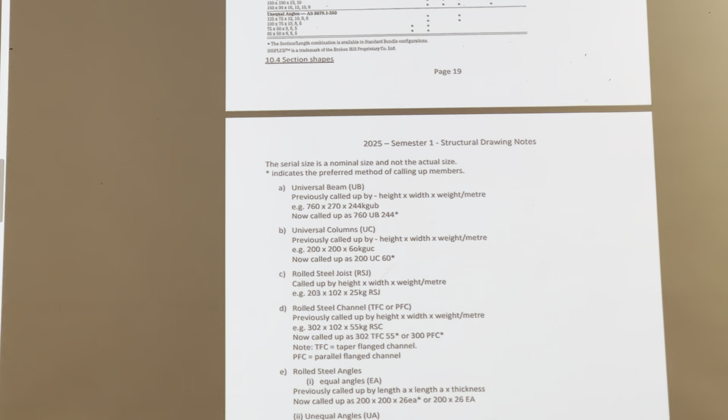A bit of revision. I shouldn't really have to do this, but there were people who weren't in class this morning, so I'm not going to go over everything. In fact, you're going to have to find out from your colleagues some of the things I said in today's lecture.

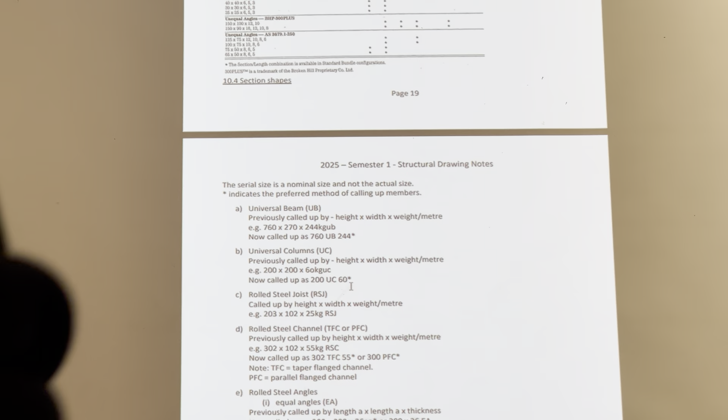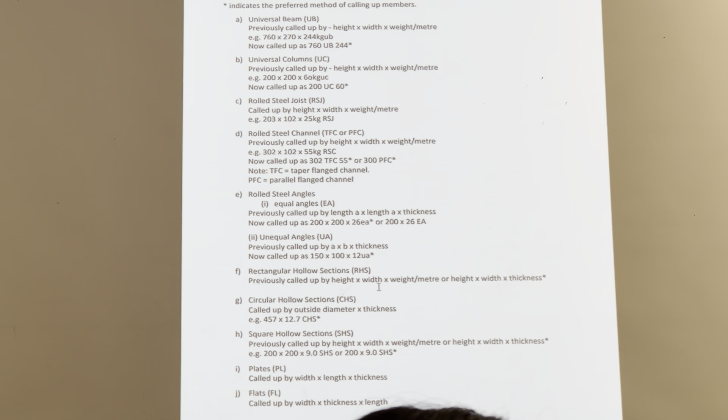We talked about universal beams and universal columns and steel channels and angles, and we talked about them in relation to the assignment. We also said how I want them called up in the assignment, and if they aren't called up that way, you will obviously be losing marks.

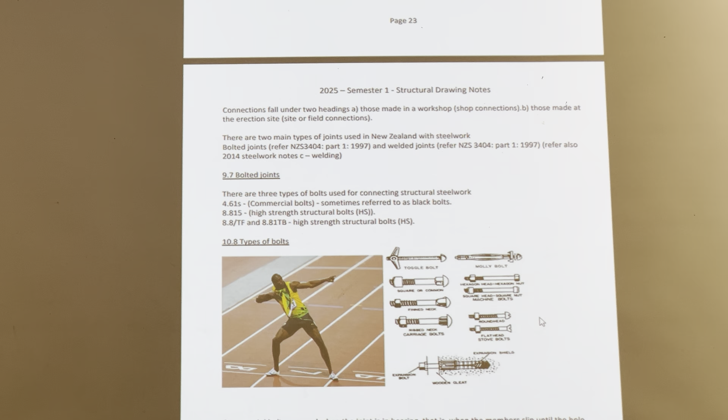I then went on to talk about the different ways we connect steel members, and indicated that bolting was the biggest one. I went over the different types of bolts and how we position them when we dimension them.

Now, all these things are very critical when it comes to assignment 3. I don't know how many of you noticed, but assignment 3 is worth 40 marks. So if you've been doing fairly badly in the old civil department, that 40 marks could mean the difference between passing or failing. For example, we've done 50% of the course.

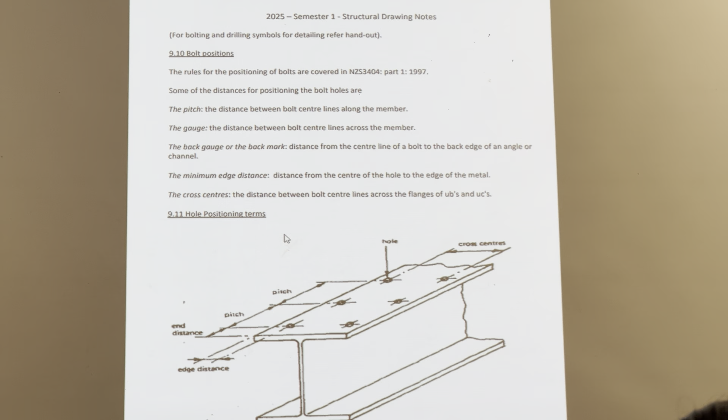If you're sitting on, say, around about 20, 18, 17, you're going to need at least 30 in this last assignment to make sure you pass.

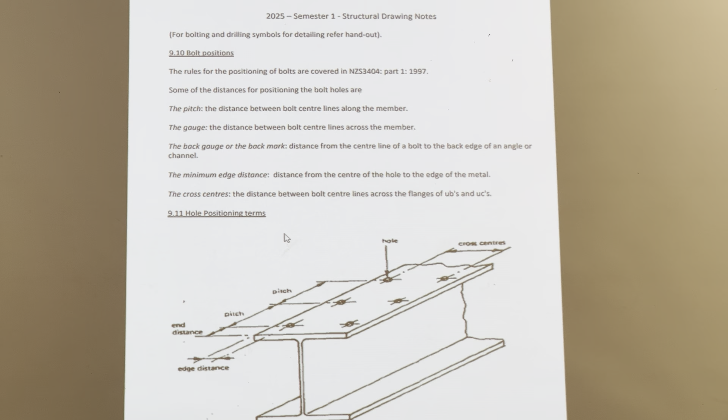So not attending the lecture is not a good start. That means this round face here becomes part of your life next year as well, or next semester, okay? The ones that don't like that face, if you can put in a bigger effort, you won't have to see me next semester. But you might still end up seeing me in the project class.

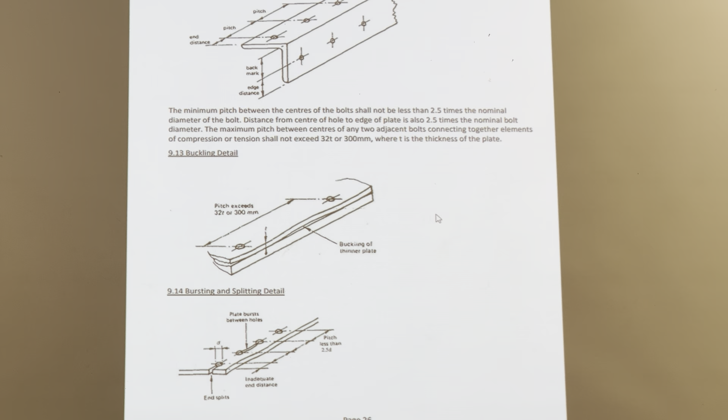So, rolling on from that, we talked about the minimums and maximums for bolting, and I told you that's going to be in the test, and I'll talk about that in the revision class as well.

And I went on to tell you the type of weld that is going to be needed in the assignment. So for those who weren't in this morning's lecture, you will need to correspond with other people in the class to figure out how to do the symbol for that on your drawings.

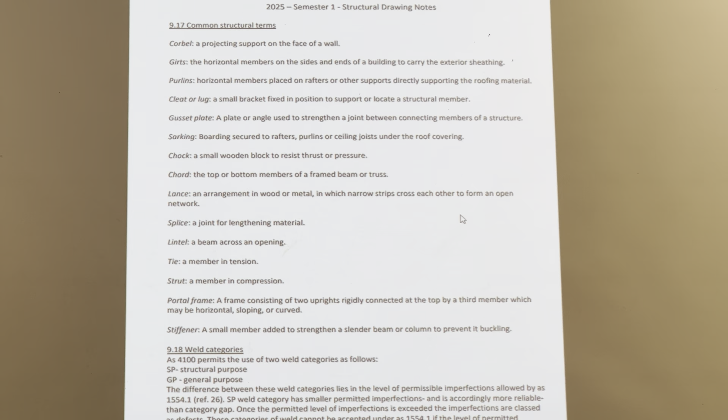So the other thing that I covered in the lecture was how to get started on your assignment.

So there are two types of students with the structural assignment. There are the ones that go, oh yeah, I don't really understand that and I don't know how to start. And they're still doing that in about week 10, 11, or 12.

And then there are the students that make an early start and suddenly find they have a few problems, and they ask me or the past student, and it gets them over that hurdle, and suddenly they've just about finished their assignment. I'd like you all to be that type of student if I can.

So this year, I've given you a couple of examples from past year students. So in terms of the scheduling...

Today we're going to talk about scheduling steel, and your assignment won't have a beam or a column, but you will have what we call a rectangular member, a hollow rectangular steel member, which will make up our portal frame, and you will have an angle and you will have a plate.

So special care in watching what I do now in my demo will mean you can get yourself some marks in your assignment, and the demonstration I'm going to do for the class exercise is also in the test, worth 3 or 4 marks.

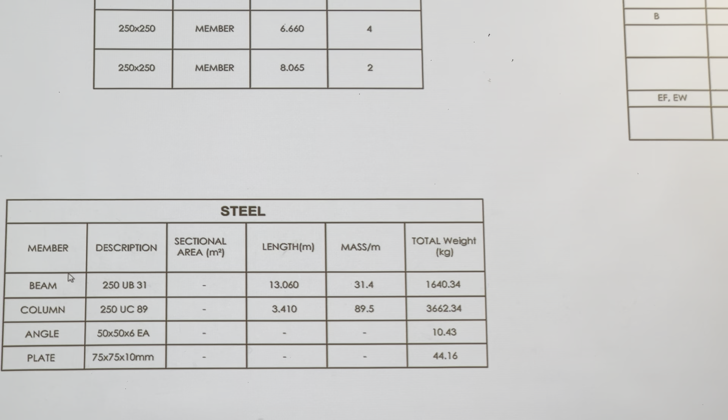So for those hunting down some marks, there might even be the odd half-mark question coming up. Now, if you've already got a half a mark, tough, you won't get any more.

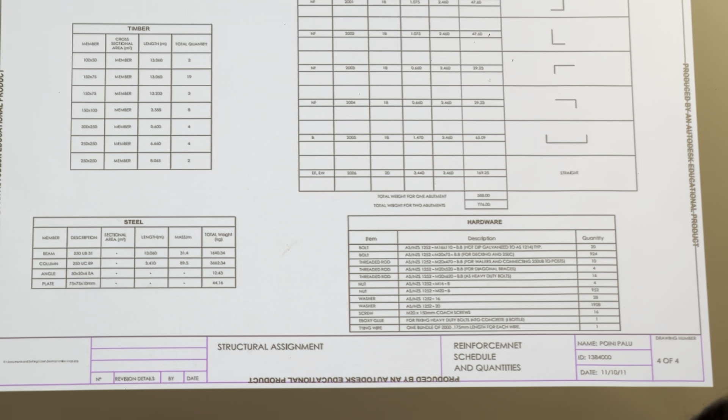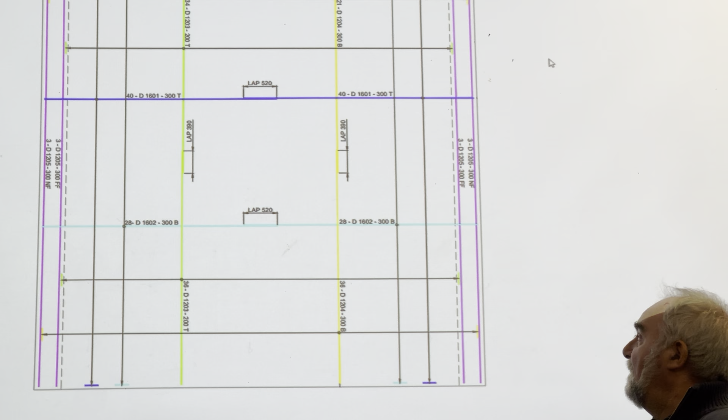The other thing I showed you in the lecture this morning - now I'll explain how I would start my project. The first thing I've noticed is there's no dimensions on that, which is great. Don't put dimensions on here, this is not a dimensioned drawing, this is a reinforced concrete steel drawing. The second thing I noticed is that the student has left a gap around here, which is the cover, so they obviously did an offset for all these lines so that nothing went into the cover.

So tip 1, draw a rectangle. I'm sure most of you can do that on CAD. Tip 2, offset for the footing and give it a line type that looks similar to that. Step 3, offset the cover all the way around. Step 4, have a think about it. This is not your assignment, this is a different one.

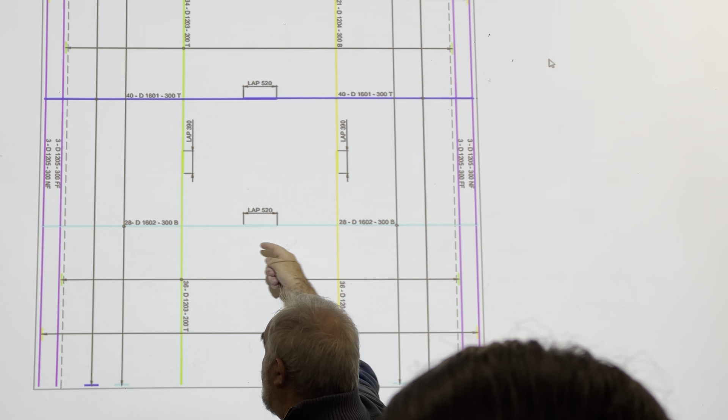These bars went along and down, and the blue ones went along and down, and this one here went along the bottom and came up. So at the end here we have to do a donut, shaped where it goes along, curve, like that - it's got a curve at the end. So you've got donuts at the end of the light blue and the dark blue.

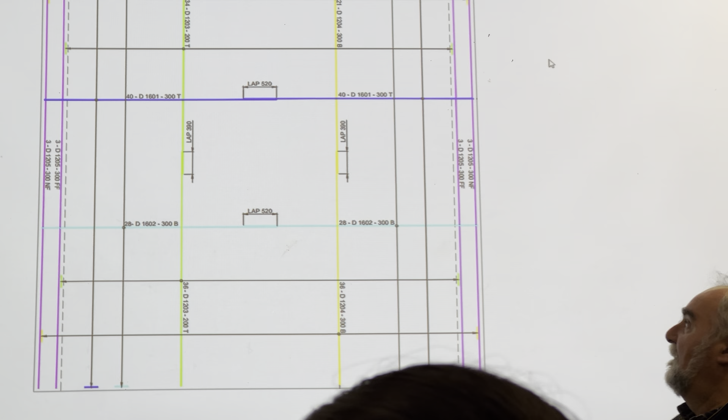You've got a lap, and I've shown you how to draw a lap, in that direction. Notice the smaller lap - there is a mistake here because it says 36 and it's lapping with 21 bars, and 36 and 34. But it doesn't matter when it comes to the overall reinforcing schedule - for example if that was 36 and 34, that makes 70, so the number of bars would be 70 on your schedule, but you'd break them down for where they overlap, 36 and 34. In your case they'll be the same number because they're exactly the same bar.

Remember how to do that? You divide the distance from where the bars start and end, etc. This circle is 2 times the diameter of the bar that you've got the circle on. You'll notice all of these fit very nicely in between the lines, and that's not easy to do - you may have to muck around with it a bit to get it to work. I don't want any of those lines overlapping anything. They can come down between here on these dashes, but not on any of the text. Alright?

Very good example, that. That's going to be worth about 7 marks, and the reinforcing schedule is worth a very similar amount. So if you can get a handle on that, you're well and truly on the way - 14 marks towards 40 is quite a lot. And of course you should be able to do most of your quantities as well after today, except for the timber one.

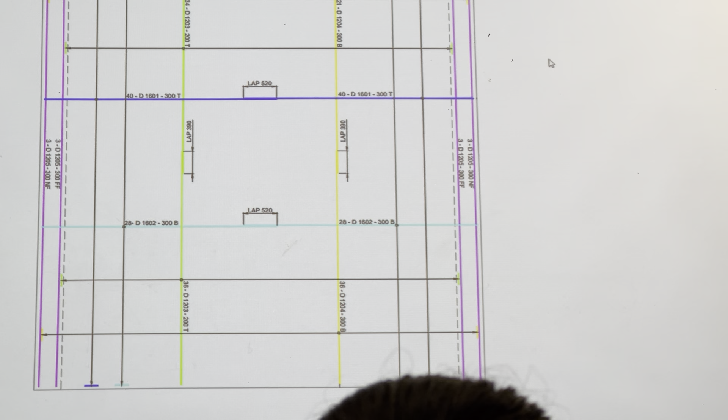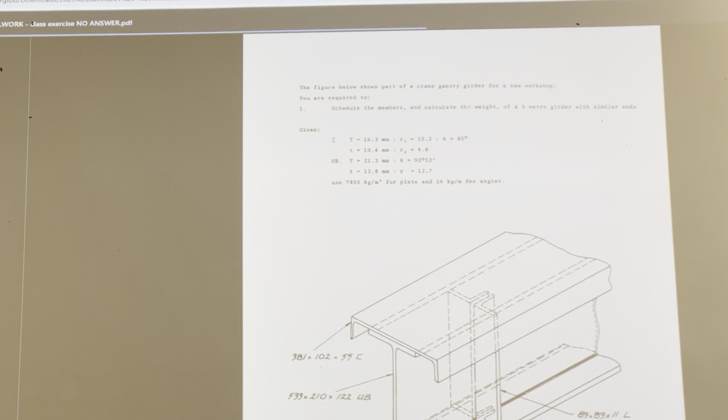Right, so without further ado, we'll have a look at the class example. Can you all open this up on your computer screens? It's only showing one end of what we call a girder. A girder is a beam that's made up of multiple members.

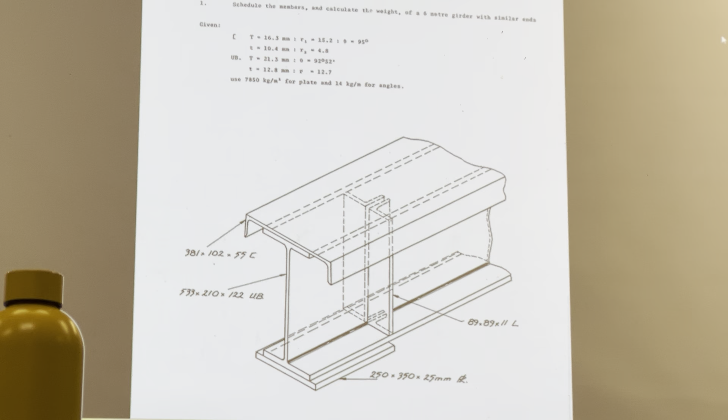And where you might likely find this - like I said to my class this morning, I think I did - if you've seen any of the Fast and Furious movies, about 8 of them, and you're into motor cars, then you would have seen the beams in the garages where they're fixing those pretty cool cars, with those things on chains that lifted the engine up so that they could fix it or swap it for a faster engine. It's quite common to see a girder type set up in a common garage, like the local garage here in Auckland, where you get your car repaired.

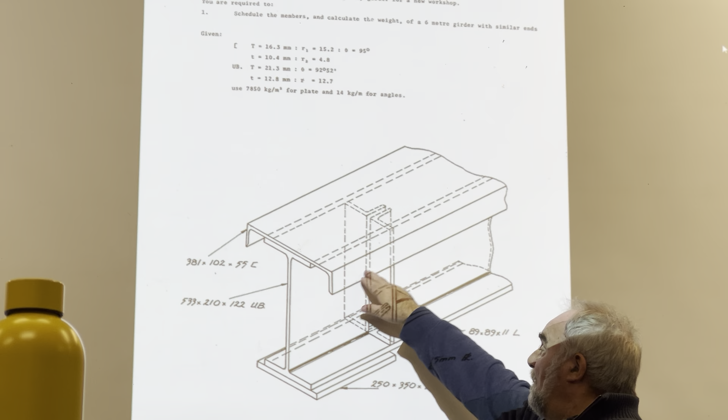And to strengthen the girder, often they have a second channel on top of the main beam going all the way, and at each end where you want to get some strength, they'll put something like a plate and a couple of angles, which will make a very solid girder.

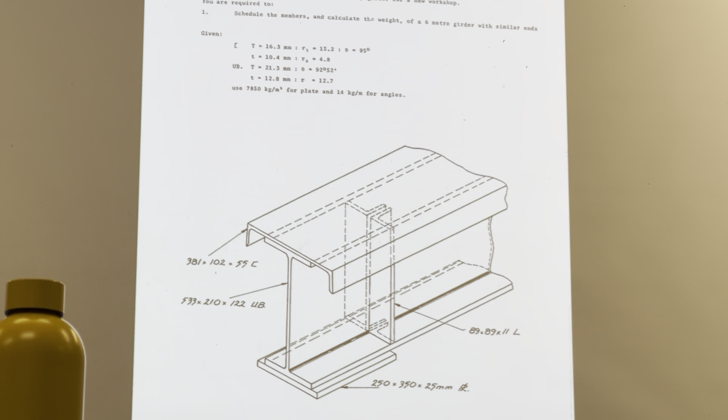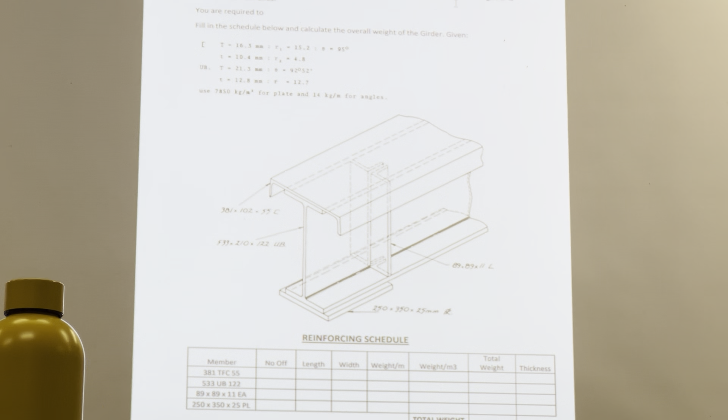Now what I'm teaching you by all this is basically what's written up the top there, and how to schedule it, schedule that steel so that a steel supplier can see it and order off it, and so that you can price it to work out how much money that's going to cost the client. So in order to do this, and I'm not going to give you the answer, but I am going to open it up. We have to draw up a table. So let's do that, eh?

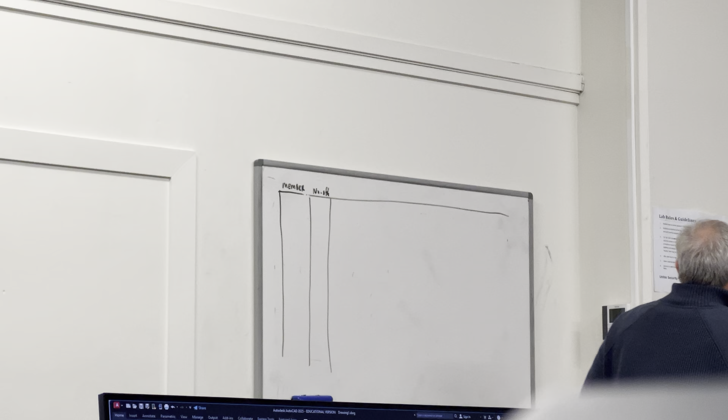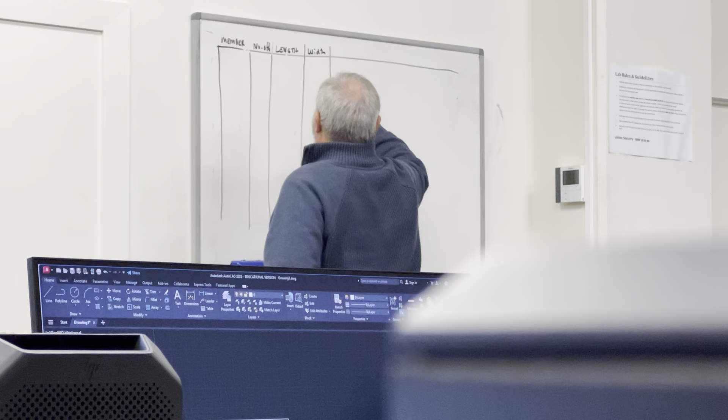So we have the steel member called up here, the number off, so member, number off means how many there are, followed by the length, then the width, then the weight per metre, and finally the total weight of each member. And as a side thing over here, the thickness.

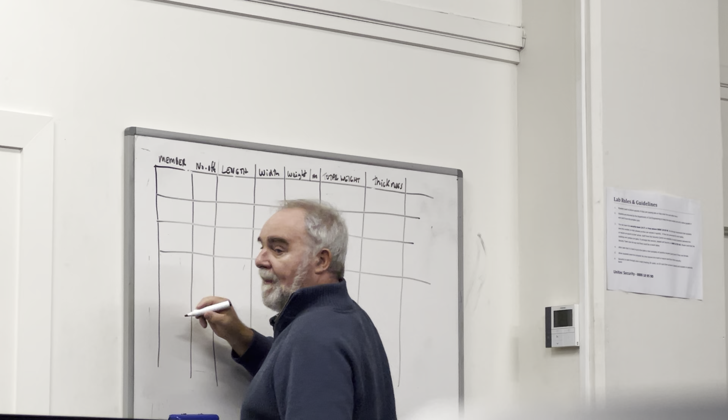Okay, so we're going to start with the member on the top, this one here, which is called a 381 by 102 by 55C, which is the old call-up, which you may well get in a test, and that translates to the new call-up, which is just a 381 TFC, a tapered flange channel. You can see that that's tapered a little bit. And it's a 55. So the number of them, there's just one on top.

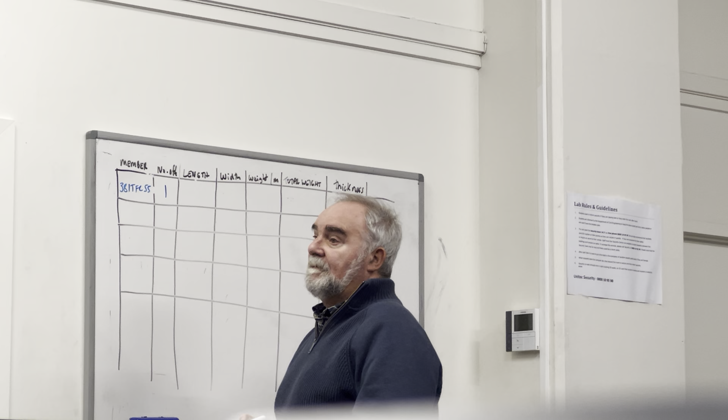Easy, the length. Anybody tell me the length? Is it 55? No. 6 metres up the top. Well done, you've just got yourself half a mark, but you got a half a mark last week, right? Damn.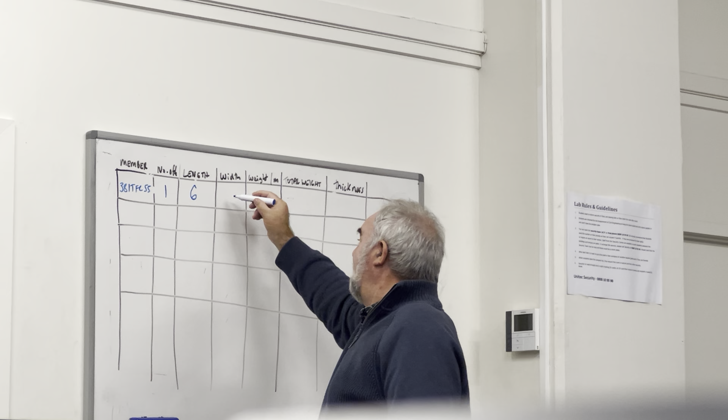Can you keep answering the answers? The width is not taken into account. The weight per metre. What's the weight per metre? The problem is all the good students have to shut up. 40? See, he did almost work. How much? 40? No. 1-4? No. 785? Count down, you missed it. 7850? No. Okay, so those that were in class this morning will know that the weight is the last number, which is 55, okay? So the weight is 55.

So when we multiply that by that by that, we get, for those that aren't holding up their cell phones, come on, you must be up to double task, no? I know 1 times 6, I can do that. 330? Thank you, no, that's not half a mark.

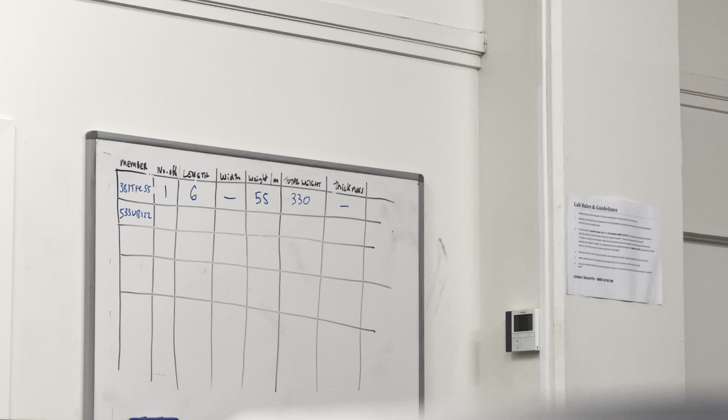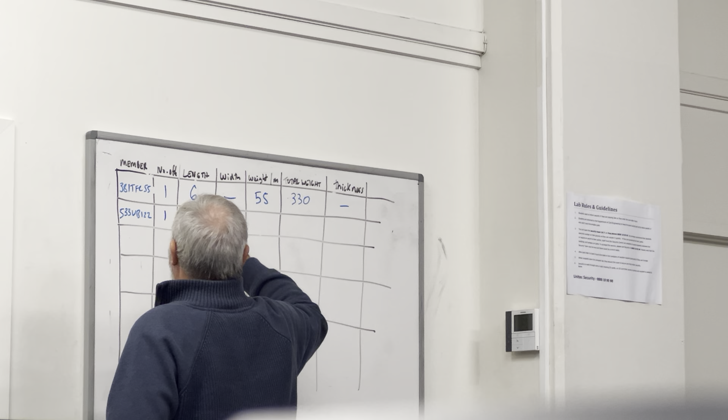Making you work. The next one, 533 UB122. That is the universal beam. Number of, that goes all the way through, that's 1. Just 1, right? And the length is 6 metres. Don't worry about the width. The weight per metre? 122? 122, correct. Equals 720? 720, right.

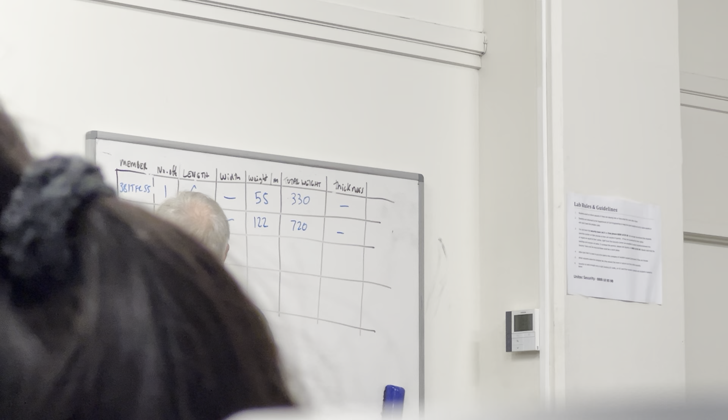Now it gets harder. The angle. The angle is 89 by 89 by 11 EA. But this morning I mentioned that you don't have to do the two 89s because it's an equal angle. It'll be 89 by 89, won't it? So it'll be 89 by 11 EA. So 89 times 11 EA. There is 2 of them there, and 2 at the other end makes 4.

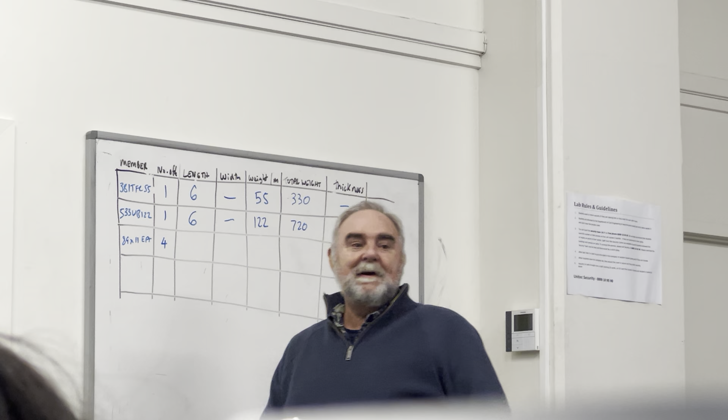How long are they? For half a mark, anyone? Where do they go from? They go from the inside of here to the upper side of there, right? So if I draw the beam, the angle fits between here and here.

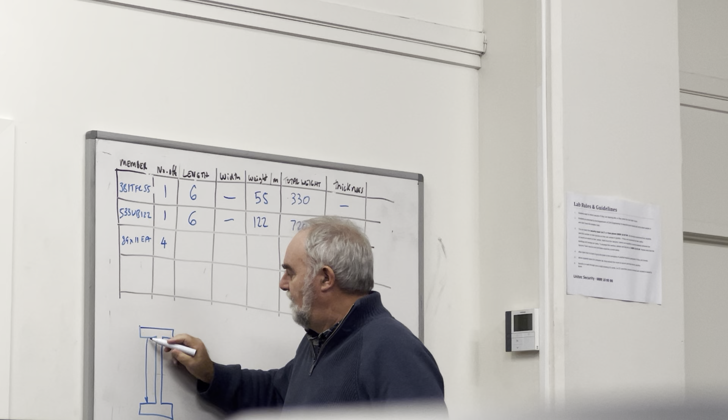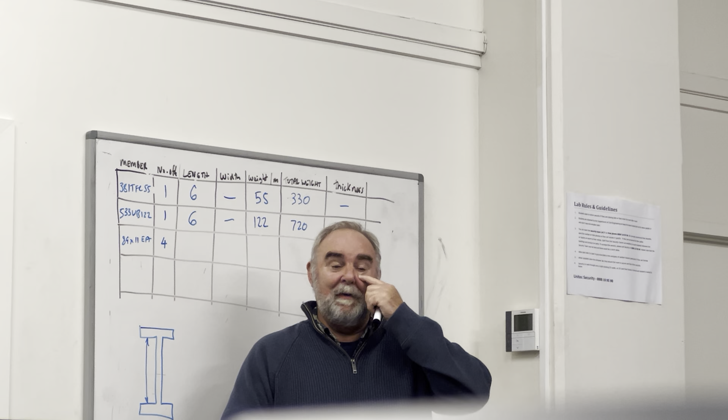Anyone tell me that height? 210? It's 2 what? 210? Wrong. Anyone else? 533? 533? Yeah, closer. Like I used to say to my kids when they were looking for the hidden Easter egg, you're getting warmer. Not that there was any Easter egg there, but you're getting warmer.

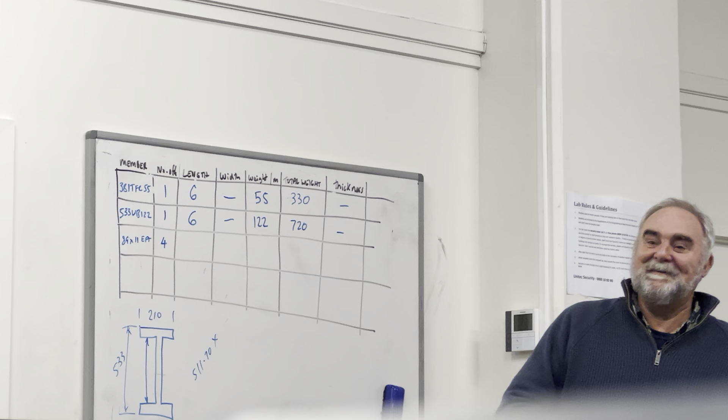483... 329, 483, that's getting closer. Don't say 484. 411. Okay, and the answer's at the top.

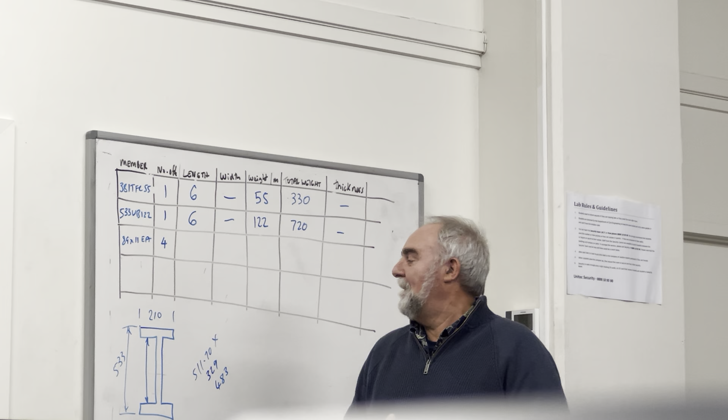For those that were in the lecture this morning, I talked about big T and little t. The big T is the flange, and the little t is the width of the web.

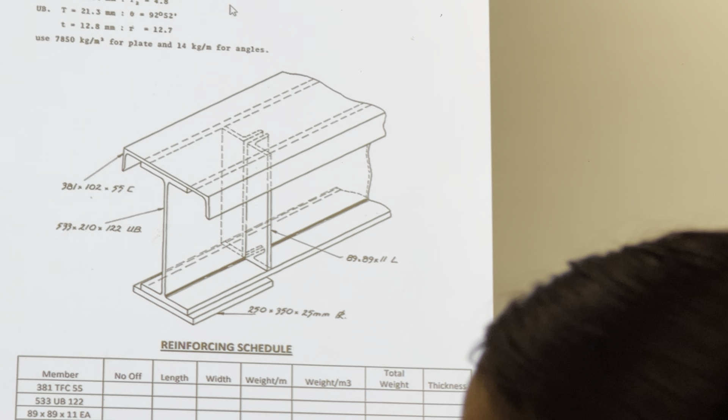So it's big T. So the answer is 533 minus 20 something. 20, 1.3. We're talking about the beam. So it's 21.3. 2 times 21.3. So 533 minus 21.3 minus 21.3 equals 490.4. That's close enough for half a mark.

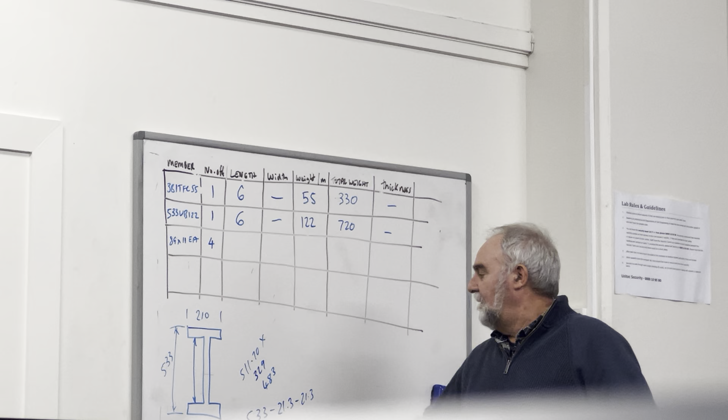20 or minus, that — which one's close enough? 483, close enough. 483 is close enough.

No, it's within 5%, and if you told Donald Trump he was within 5% with his tariffs, you'd be lined up and shot.

Yeah, so that's how you work that out. So hold on, I'll stop working now. I've got to keep working.

The length is now 0.4904. The reason for the 0 is in the end, our total weight is going to be in kilograms, and you have to convert it to meters. Okay, just like the steel. The width here is not relevant. The weight per metre, last half mark chance.

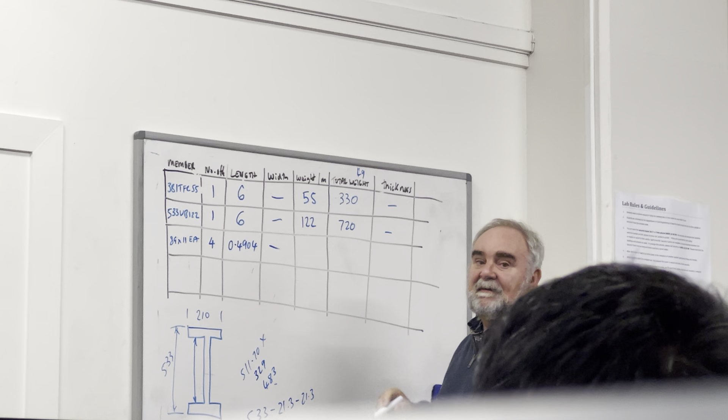Count you down, 10, 9, 8, 7, 6, 5, 4.

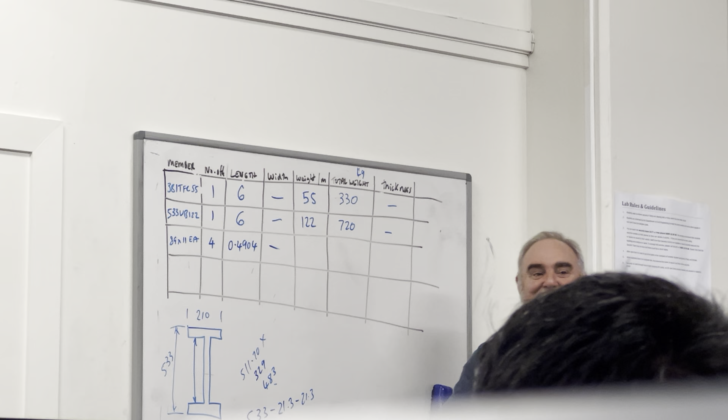Do I get marks if I'm not from this class? What class are you in? Yes, sir. You are too? No, you're sneaking into my class. Yeah, that's why you'll get marks off, because you're talking in the wrong class. He knows it — it's like you know the answer to the lottery, but yeah.

Okay, it's up there written, somebody yelled it out before for another thing. It's 14 kilograms per metre. Alright, so the answer's 14.

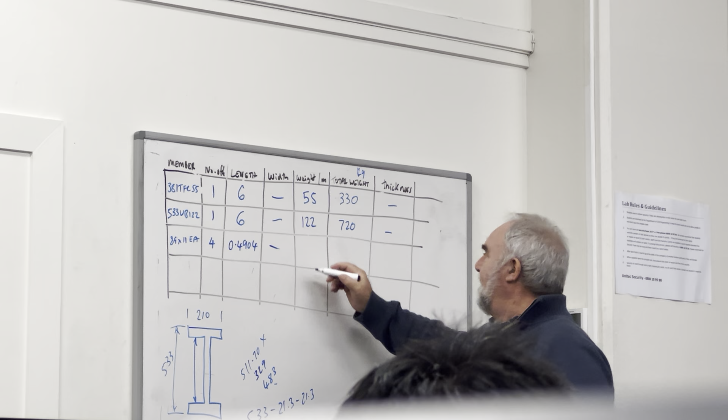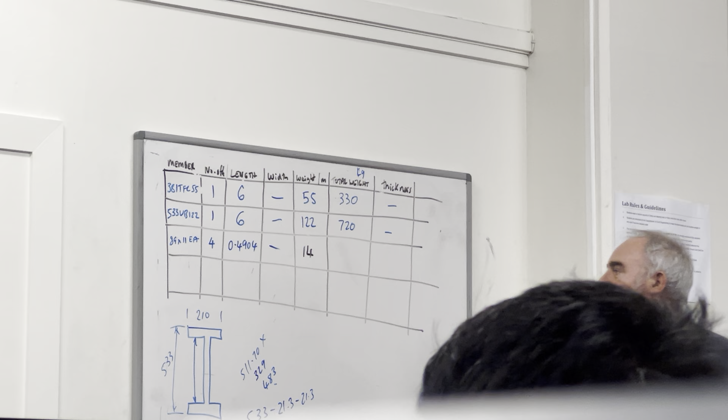And so when we multiply — when my person with the calculator goes 4 times 0.4904 times 14 — they get the answer of 27 point something, isn't it? 27.46. Okay.

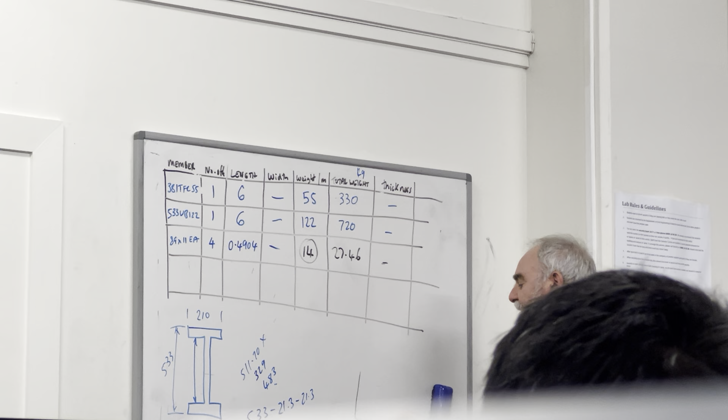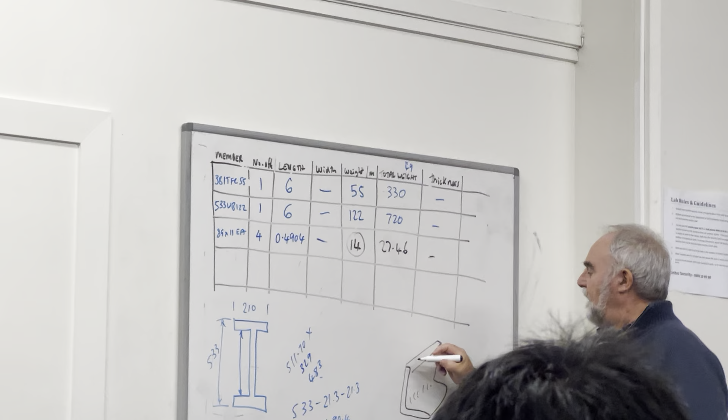Now let me just tell you what you're going to have to do in the assignment. You're not going to be given that 14 — I'm going to make you work for that. So in the assignment, I've already given you the angle, and I've told you how long it is this way. Right? So I've given you this in CAD.

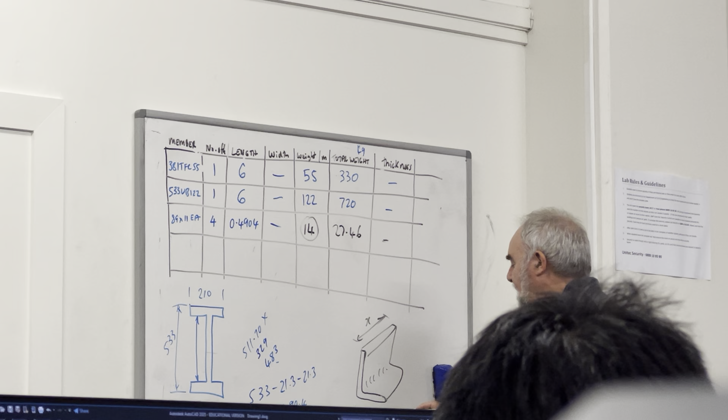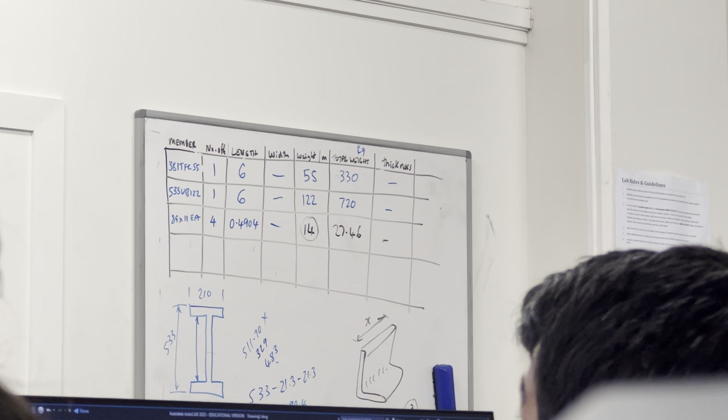So you need to draw, if it's a P line, right the way around, list it, and that'll give you the area. Let's call that X, the area times X equals cubic meters, doesn't it? And when you get your cubic meters, you need to use that 7850. Where's that disappeared to? 7850 is the weight of steel, and that'll give you the overall weight of it. So once you get the answer here, you multiply it by 7850.

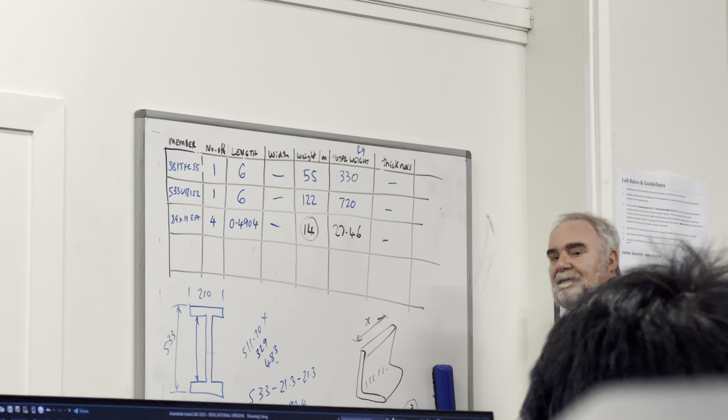Now when you get the square metrics, you're going to get that in millimetres squared. You'll have to convert that to metres squared. That's not easy to do. And then you multiply it by that, and that'll give you that number there. So that is something to take a photograph of for your assignment.

Back on track, last one. The plate at the bottom. So the plate at the bottom is 250 by 350 by 25.

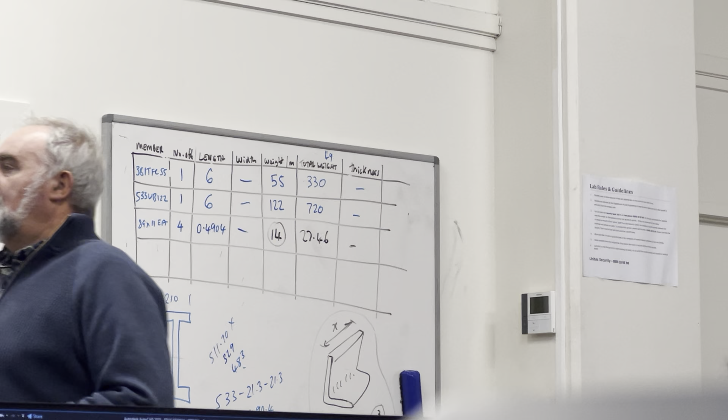Don't make that mistake of putting those numbers here. What you need to put there is — we'll put the 250 by 350 by 25. The 25 is the thickness.

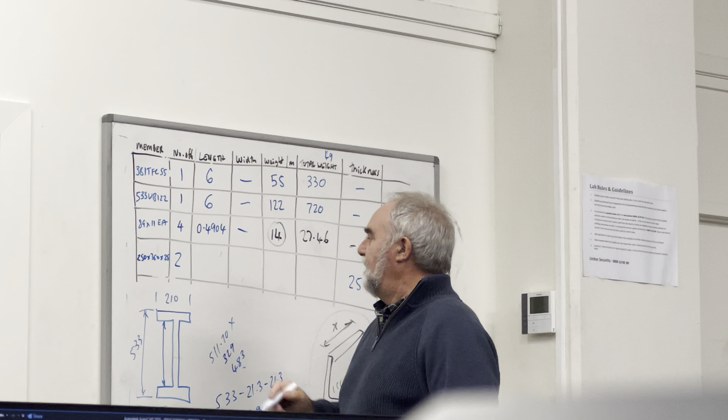There are two of them, one at each end. And what order do we put these in? The length and the width — it may not be what you think. In fact, it's the 0.35 first. So that's 0.35 and the 0.25 second.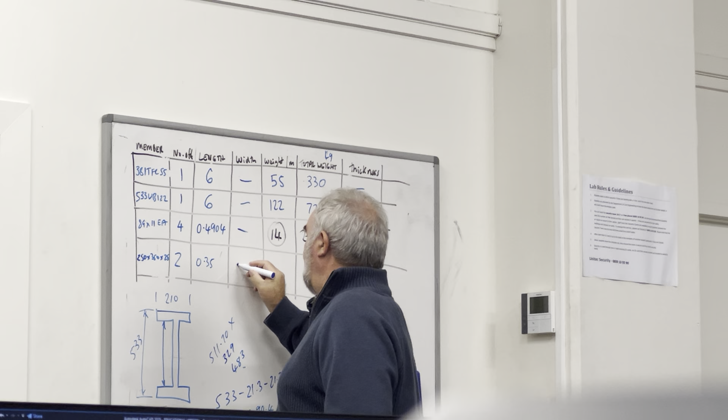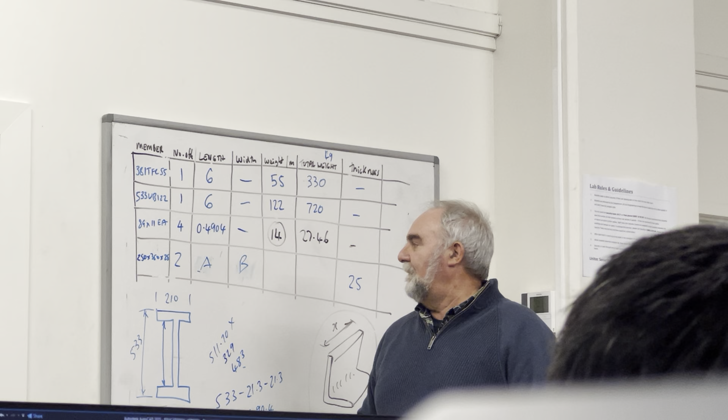Now that is where I catch you all in the test. I have this blank, and I have A there and B there, and I ask you to calculate A and you go 250, 0.25 — easy — and move on to the next one. Whereas in actual fact, those numbers are reversed on this table. So if you can remember that and you get that as a question in the test, it is actually quite easy.

And it's 0.35, not 350, because we're converting it to meters. So the weight per cubic meter is 7850. So it's that times that times that — and now hold on, this is actually 0.025 times that. And the answer, which is on the big screen, is 34.34.

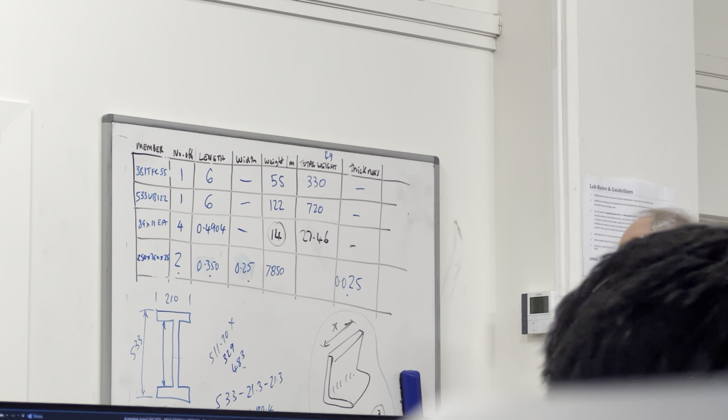And the total weight, don't forget to do that. A lot of students get a wee bit lazy in their assignment and they forget to put the total weight in. That will mean that they won't get the total marks. It is 1123.8 kg.

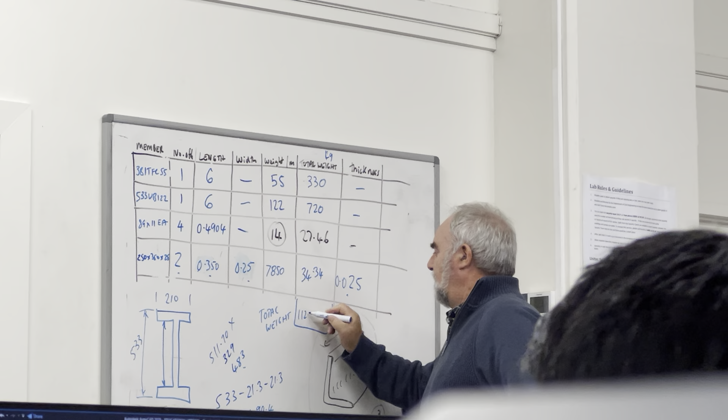And just as a relation to that, 483 being quite close to 490 - should have given that, eh? That bullet was real close on Donald Trump, wasn't it? But it wasn't good enough.

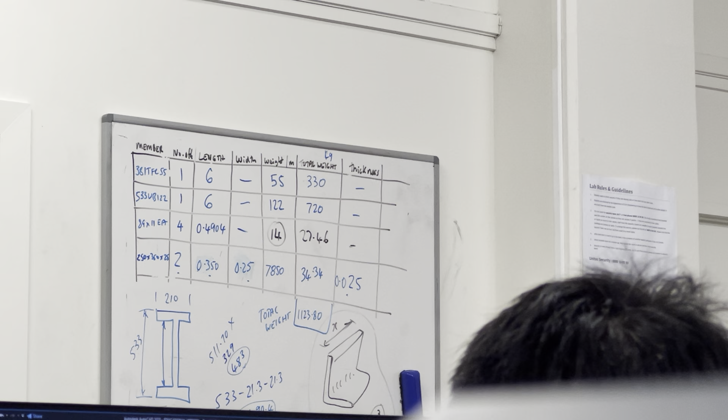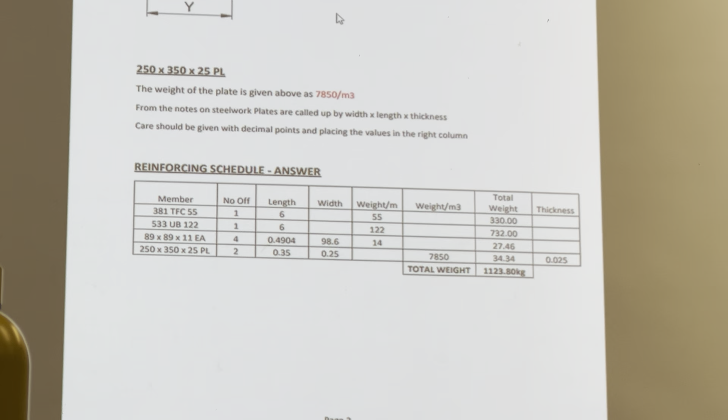No, it's all right, it depends. I mean if you had to get to the nearest 100, you went too far off. The nearest 10 - wiggle room to get in there? Almost, yeah. But then you've got to weld it. Should be fun, you're looking at a 5 or 6 mil weld.

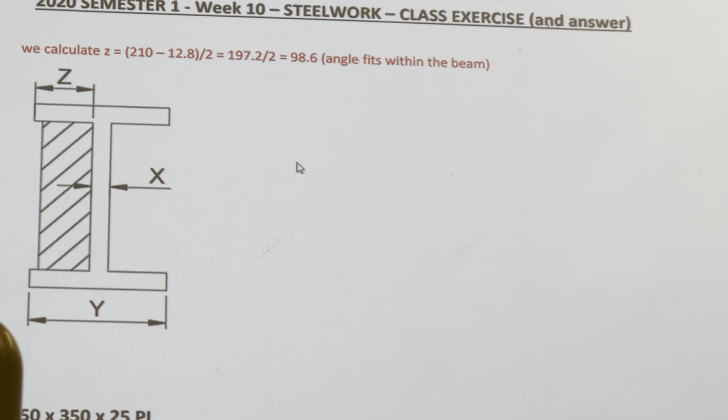Okay, now this I'm going to make available to you all. I just want to tell you one more thing before I log off here. With this one, you can see where I'm blowing it up, with the girder - we'll go back to the sketch of the girder.

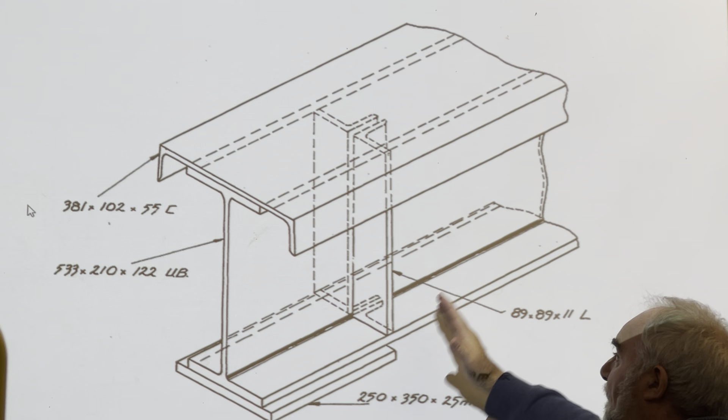It depends how the mechanics put what I think is called a chain and tackle on top of the girder. They normally have it so that they can freely slide it all the way along, positioning it over the car or truck to pull the motor out. So it would be very critical to calculate whether that's going to go over the edge, because if it does, it's going to interrupt the flow of the chain moving along. So we do a quick calculation.

We know this is 89 by 89, but we don't know that width there, from there to there. So we need to do a quick calculation to figure that width out. All I needed to do was work out the overall width. The overall width was 210 minus the x, which is 12.8, taken from that table at the top. We end up with 98.6, so there's plenty of room for the angles to fit inside.

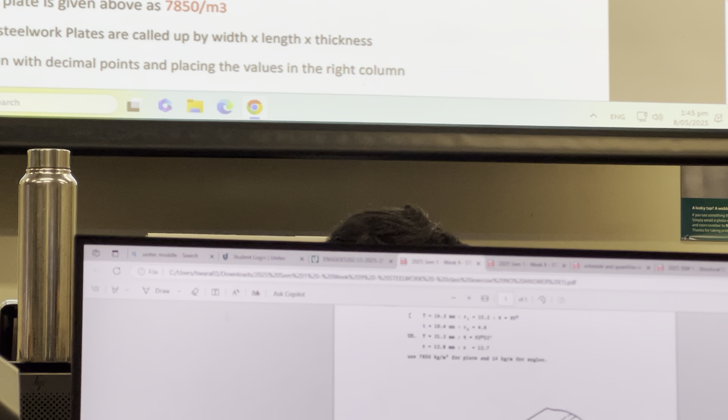And that's just a bit of playing with steel, really, and scheduling it. But the reality is that steel's worth a lot of money per metre, per kilogram, so you really do have to get your calculations right.

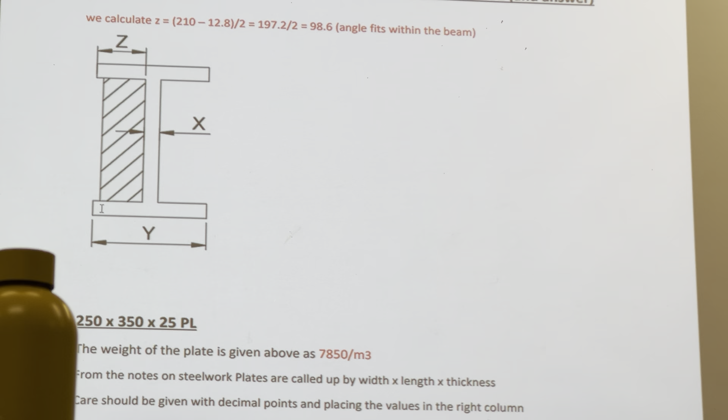And the other thing is, when it arrives on site, you want it to be solid and fitting properly in place. If you got your calcs wrong and the thing came to site, it was worth a lot of money to take it back and make it fit. So you had to be quite precise with steel work, including the holes and all that sort of carry on.